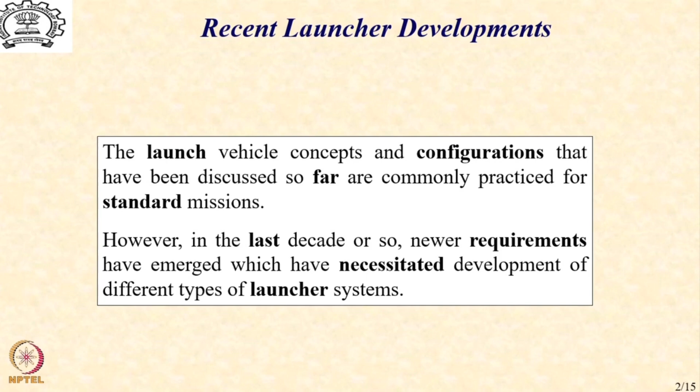However, in the last decade or so, newer requirements have emerged which have necessitated the development of different types of launcher systems. And among the many new requirements that are emerging in today's scenario, the main ones which are driving the technological developments across the globe are directly related to two specific points. One, larger sized spacecraft and missions to farther planets. These are the missions that most of the space agencies are currently looking at to increase the mass fraction capability of most of the launch vehicles and to also send spacecrafts to larger and larger distances in our solar system.

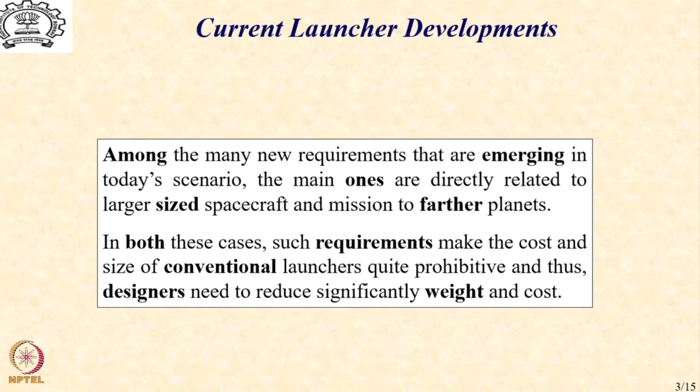So it's not that we cannot lift heavier vehicles with the current technology, but then the cost is becoming larger, the vehicles are becoming massive, and in the process there are also infrastructural and technological constraints that start impacting the overall mission performance. And in view of the above, there are other technological options that are also being explored, of which the air-breathing rockets and relativistic or photonic rockets are the ones which are being actively talked about, including experimentally developed.

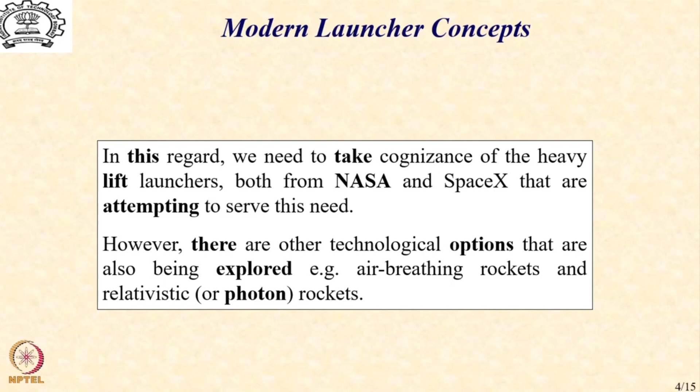If we look at the basic ideas of these two concepts, we find that the air-breathing rockets are a result of scramjet technology, which is not new to us, and is exploring the possibility of extracting oxygen from air to reduce rocket liftoff mass. And we know that if we do that, then our payload fractions will significantly improve while keeping the cost within manageable limits. On the other hand, photonic rockets are those vehicles that make use of or intend to make use of matter-antimatter concepts, which are in the domain of scientific developments, along with the radiation principle to generate large speeds and still have lesser launch costs. We will explore these concepts a little more next.

Let us first look at the air-breathing rockets concept. The scramjet technology essentially makes use of atmospheric air to support combustion and is capable of propelling vehicles up to Mach 15 speed, which means that we can achieve very high speeds, which is a requirement for sending the objects deeper into space.

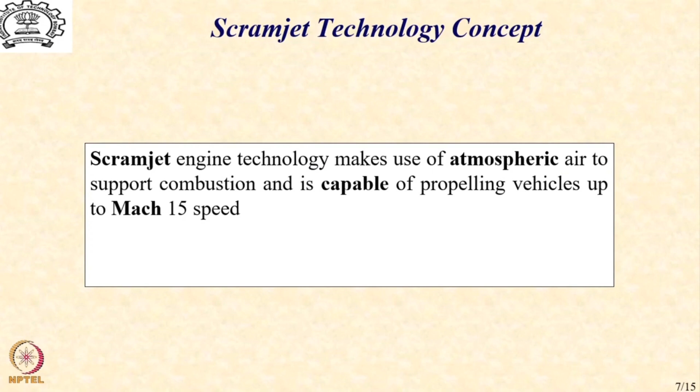The basic principle, of course, is the extension of the well-known ramjet principle, wherein you create an engine which actually does not have any moving parts, and you make use of the moving air kinetic energy to convert it into potential energy or pressure inside an engine, and then we burn fuel inside that engine to significantly increase the temperature and the pressure, which is then exited at a very high speed to generate a large amount of impulse, which is necessary for generating high speeds.

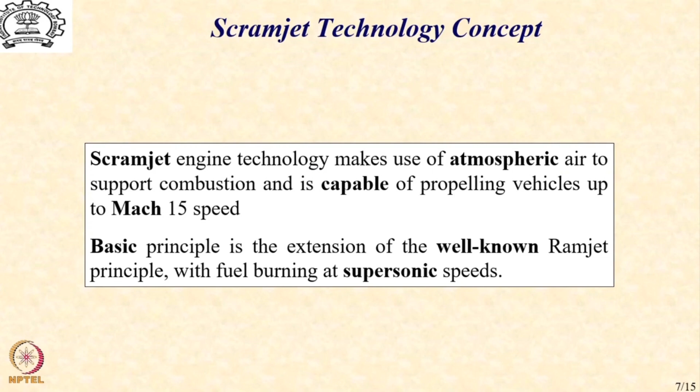An important aspect of this is that we need to sustain combustion at supersonic speeds. Typically, most of the combustion in the conventional launch vehicle occurs at subsonic speeds, and particularly for air-breathing systems, use of supersonic combustion is something which requires a lot of effort and challenging work. In fact, the scramjet is an extension of the ramjet, where S and C stand for supersonic combustion, which means if you take a ramjet engine and then you have combustion at supersonic speeds, you get a scramjet engine.

A typical concept of such an engine is shown below. So this is a typical sketch of a scramjet engine, which takes in the air coming at hypersonic speeds, that is speeds well beyond Mach 4 or 5, then creates a supersonic diffuser of reducing cross-sectional area that significantly increases the pressure until it reaches a very high value, and in the process the velocity is reduced to just about supersonic speeds, at which the fuel is added and a large amount of heat is added to this flow at supersonic speeds to further generate very high pressure and temperature, which is then again expanded through a supersonic nozzle which generates again hypersonic speeds at the exit, and in the process generates a very large amount of thrust.

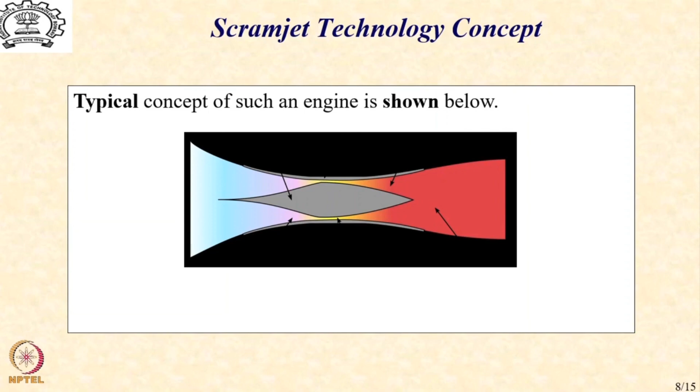This technology, while greatly challenging, has been found to provide great benefits, and many countries are creating such engines. For example, the X-30 program of NASA, HSTDV of DRDL, and ABPP of ISRO, that is Air Breathing Propulsion Project, which have also seen technology demonstrators in the last 2 or 3 years.

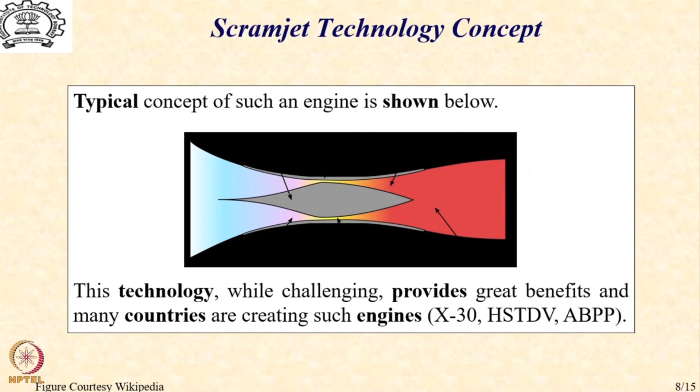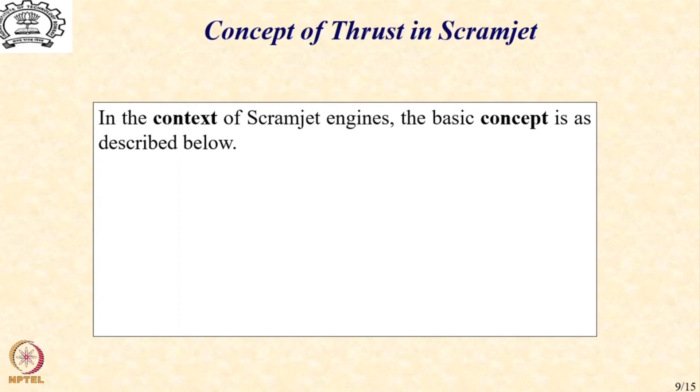This figure, of course, is courtesy Wikipedia, which just talks about the basic idea of a scramjet engine. So how does one talk about thrust in such an engine? Well, you require a more complicated model to get the exact thrust expressions. A certain simplified formulation is possible, which gives us a broad understanding of what the implications of such an engine are.

So what you see below is a schematic of a scramjet engine which is moving at a forward speed of v, and it is taking in a certain amount of air, delta m in, represented through that rectangular parallelepiped in front of the vehicle. The same air, once it enters the scramjet engine, exits with a high velocity VE and has the amount of mass exiting, which is delta m out.

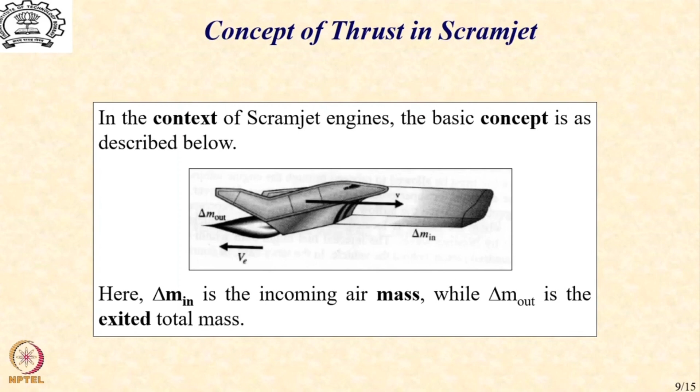Here delta m in is the incoming air mass, while delta m out is the total mass, which means it includes the mass of the air which came in plus the amount of fuel which has been added in the combustion chamber and the related combustion products. So given below is the simplified scramjet thrust equation, and you will find that this is similar to the thrust equation that we had seen in the context of a conventional rocket, except for one important difference which makes the scramjet engine generate a lot more thrust.

As you can see, m dot in is the air mass flow rate, while m dot f is the fuel flow rate. So in the conventional rocket, the thrust is m dot g ISP, which is m dot f, whereas in the case of scramjet engine, the total mass flow rate to which this ISP is attached is m dot in plus m dot f. Of course, there is also an associated ram drag term. Because of the ram effect, there is a drag which is experienced by this vehicle, and that subtracts from this thrust.

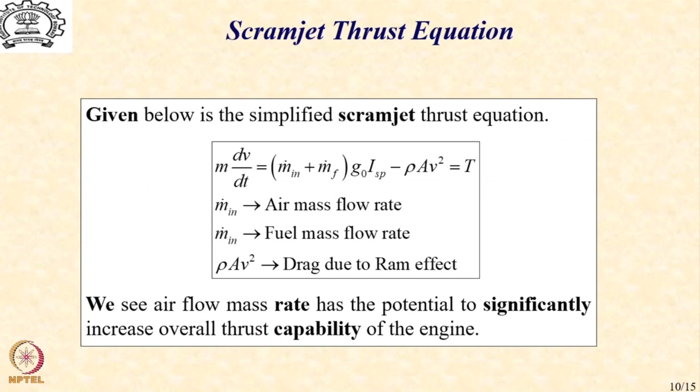But we note that by appropriately designing the inlet air, it is possible to significantly increase this term and hence generate a large amount of thrust through the air breathing principle, and it can significantly increase the overall thrust capability of the engine and hence the mission itself.

Let us now turn our attention to the photon or the relativistic rocket. In the context of rockets that are meant for missions to faraway planets, the velocities to be imparted are generally quite high and possibly not feasible with the conventional hydrocarbon fuels or even cryogenic fuels beyond a certain point. In this context, we also know that as rockets approach the speed of light, the relativistic effects become important and the standard rocket equation is no longer valid.

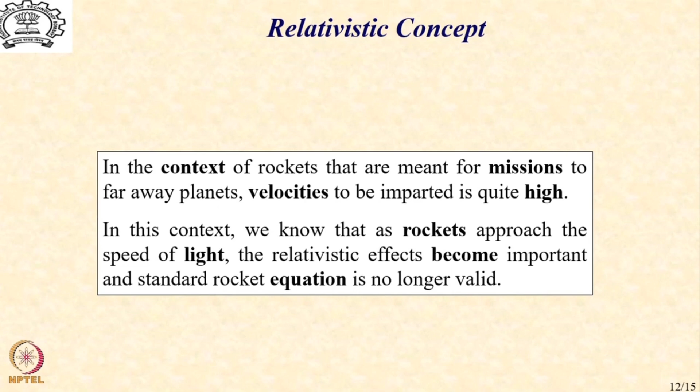In this regard, a novel concept, though at the conceptual stage in the laboratories in the scientific domain, called the matter-antimatter photon rocket, is being looked at as a practical and viable option in future. The idea is that such a rocket would contain matter and antimatter, which would be allowed to annihilate each other, leading to a sudden burst of gamma ray radiation.

The basic phenomenon is shown below schematically. So you have a rocket which contains matter and antimatter with zero velocity, and then they are allowed to annihilate each other, generating a burst of gamma ray radiation which is directed opposite to the desired velocity, and as a result this radiation energy, expended in a very short time, can generate a large instantaneous change in momentum and an instantaneous large velocity of the object.

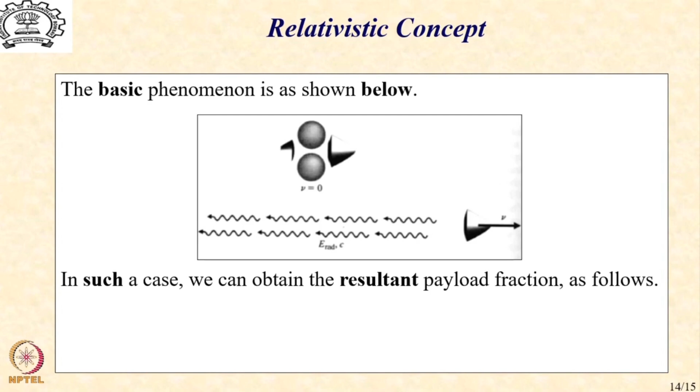Of course, there is an important point that we need to note, that is the payload mass fraction which is possible in such scenarios, and from simplified analysis for such a concept, it is found that the mission payload ratios are given by this expression, that is 1 by gamma into 1 plus beta, where gamma is square root of one minus v square by c square and beta is v by c. Typically, you will find that these mass fractions are not very large, particularly when you start approaching velocities close to the speed of light.

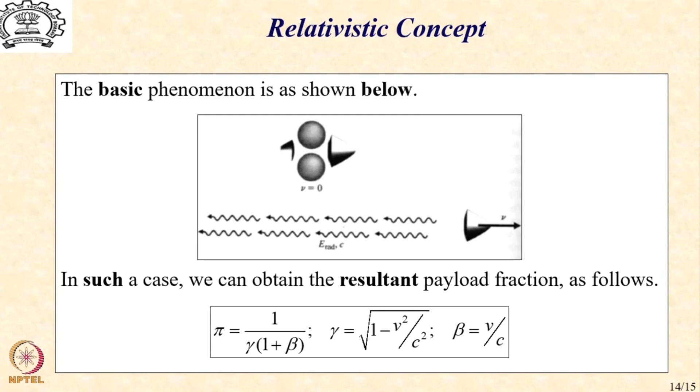It can be shown that if you want a velocity which is 1/10 of the speed of light, the mass fraction that you would support would be of the order of 10 to the power minus 6, not really useful. But if you go to lower velocities, let's say 1/100th or 1,000th of the speed of light, in such situations you can still generate a decent amount of velocity for a decent amount of mass fraction.

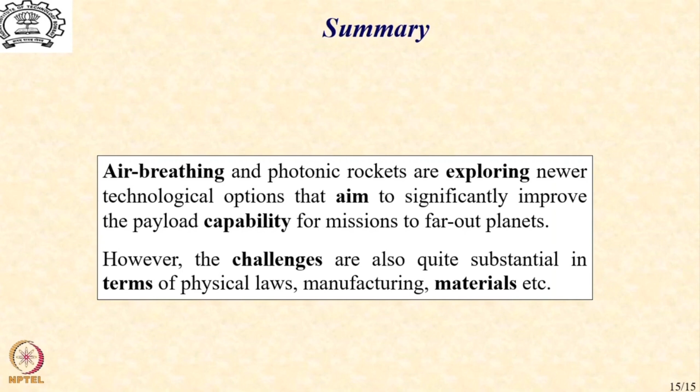So, to summarize, air breathing and photonic rockets are exploring newer frontiers of technological options that aim to significantly improve the payload capability for missions to far out planets. However, challenges are also quite substantial in terms of physical laws, manufacturing, materials, etc. So in this lecture segment, we have just looked at two possible futuristic ideas to help us synthesize missions that require large payload fraction and large velocities for missions to faraway planets.

With this, we have considered the launch systems and their configuration, including their trajectory solutions, and we will now turn our attention to two important operational features of launch vehicles which are necessary for creating the missions that we are currently talking about. One of them is the SSTO or TSTO, the single stage to orbit or two stage to orbit concepts, and the other one is the concept of launch window, which is an essential ingredient for synthesizing missions that aim to visit faraway planets, establish orbits around them, and also land on the surface. So we will look at these two ideas in the next lecture.